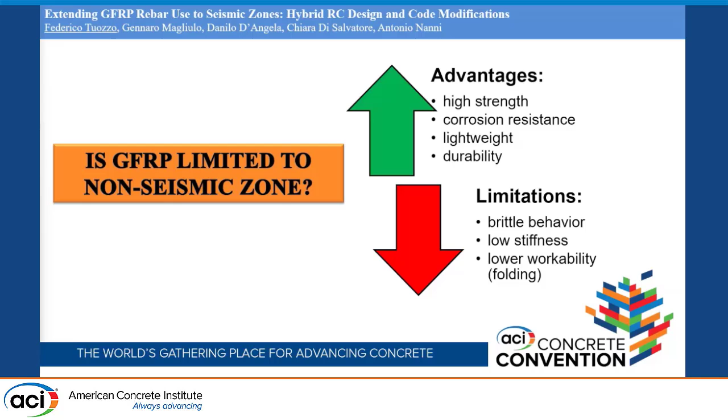The question we are addressing today is: is GFRP limited to non-seismic zones? To answer this, we will analyze the properties of glass fiber-reinforced polymer materials, GFRP. On one hand, it offers advantages such as high strength, corrosion resistance, light weight, and durability. On the other hand, it has limitations including brittle behavior, lower stiffness, and lower workability, which impair its use in seismic zones, especially for structures designed for energy dissipation as required by the last code.

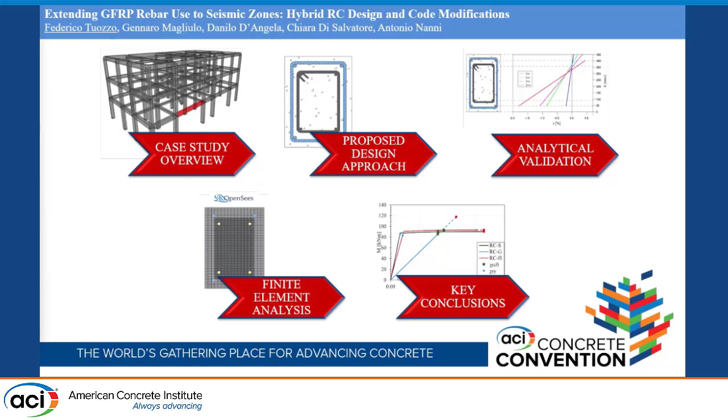To address this challenge, I will present the work carried out by my research group, which proposed an innovative hybrid section. After the pre-design phase, we focused on the beam, which was designed with three different approaches, one of which is hybrid, and the designed beam was analyzed through finite element and analytical methods, as we will discuss shortly.

The case study involves a reinforced concrete moment-resisting frame for a residential building, regular in both plan and elevation, designed according to the current code for a high seismic hazard site, such as seismic design category D, for example according to ASCE 7. After the pre-design phase, we focused on the beam highlighted in the figure, and the choice of this beam reflects its greater exposure to environmental elements with respect to the beams in the inner part of the building and its greater load demand with respect to the beams on the other floors.

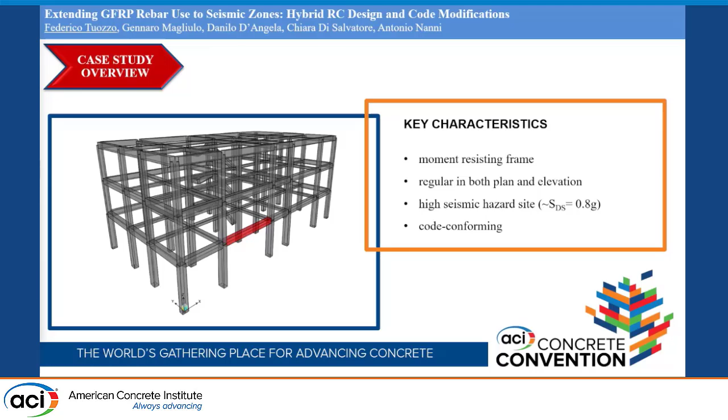The beam highlighted in the figure was designed with three different approaches. The first, a reinforced concrete section with traditional steel rebar according to ACI 318. The same cross-section with the same bending capacity, but with GFRP reinforcement according to ACI 440, and the last, the innovative hybrid section with the same cross-section and the same bending capacity that maximizes the properties of the materials involved in the section.

The GFRP used as stirrups and longitudinal reinforcement placed in the outer part of the section reduces the cover with respect to the traditional steel section due to its corrosion resistance, while the steel reinforcement in the inner part of the section doubles the cover with respect to the traditional steel section and improves durability and ductility of the section.

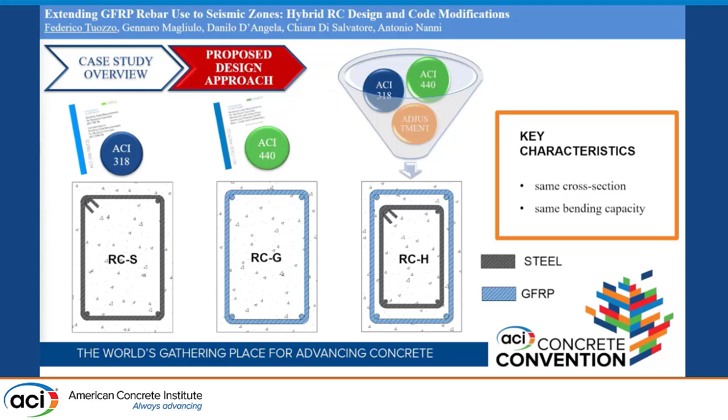The design approach was conducted according to the current code with some adjustments to consider the combination of these two materials involved in the section. This approach aims to improve the sustainability and durability of reinforced concrete construction. The design followed the current code, in particular ACI 440 for elements reinforced only with GFRP, and ACI 318 for elements reinforced only with steel, with some necessary choices and modifications to consider this innovative hybrid section.

In particular, regarding the strength reduction factor for tension-controlled sections, the current code proposes 0.55 for elements reinforced only with GFRP and 0.9 for elements reinforced only with steel. The lower value for GFRP reflects its brittleness, with a significantly reduced capacity during the design phase. However, in the hybrid section, the addition of the steel compensates for the lack of GFRP ductility. For this reason, we propose to adopt a value according to ACI 318 for elements reinforced only with steel.

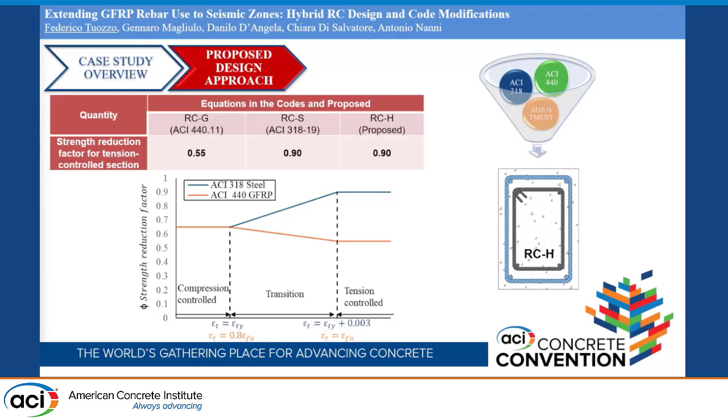Adopting the steel strength reduction factor for tension-controlled sections implies referring the strain, minimum reinforcement area, and balanced reinforcement ratio requirements to those of steel. For brevity, I will not go into the details about this choice, but regarding the shear strength, we proposed to consider only the contribution of the concrete and the GFRP stirrups. This is a safeguard approach, as there are no established models currently in the literature for evaluating the capacity of this innovative hybrid system with stirrups arranged in two different layers and made from two different materials.

About the concrete contribution to the shear strength, the current code's proposed formulas differ due to the reduction factor associated with GFRP reinforcement, caused by its lower elastic modulus, which results in greater deformation and cracking for elements reinforced only with GFRP, and this cracking impairs the shear strength of elements reinforced only with GFRP.

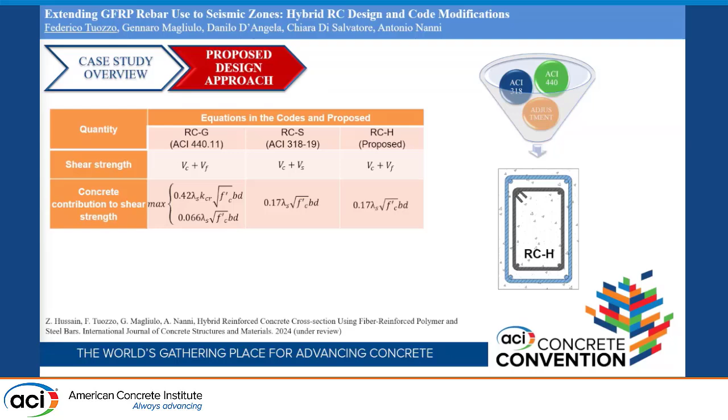However, in the hybrid section, the addition of the steel in the inner part of the section improved the stiffness of the element, leading to a response similar to the element reinforced only with the steel. For this reason, we proposed to adopt a formula according to ACI 318 for the element reinforced only with the steel. The proposed approach is summarized here and will be validated with further numerical simulation and experimental tests, and more details about this approach are available in the paper currently under review.

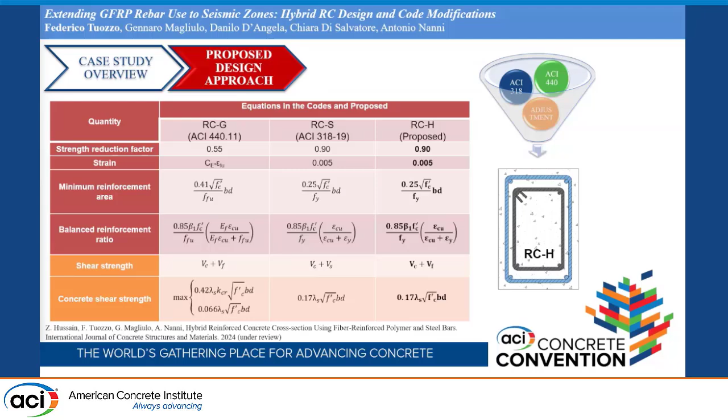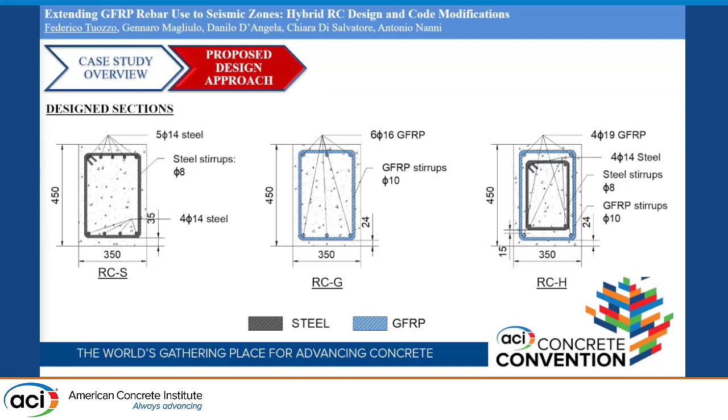The proposed approach led to the design of 3 different beams with the same cross-section and the same bending capacity, compliant with the respective code requirements. In particular, for the steel reinforcement, according to ACI 318, including the seismic requirements, and for the GFRP reinforcement, according to ACI 440. The designed beams were verified for seismic zones through Eurocode 8.

American codes mainly prescribe checks for seismic zones only in terms of dimensions and reinforcement quantities, while Eurocode 8 includes a local ductility check in terms of curvature. The demand was evaluated assuming the equivalence between the behavior factor from Eurocode 8 and the response modification coefficient and importance factor from ASCE 7. The demand depends on the characteristics of the structure and the seismic site, while the capacity was evaluated according to Eurocode 8 as the ratio of ultimate curvature to the yielding curvature, and in this case study was evaluated through analytical and finite element methods.

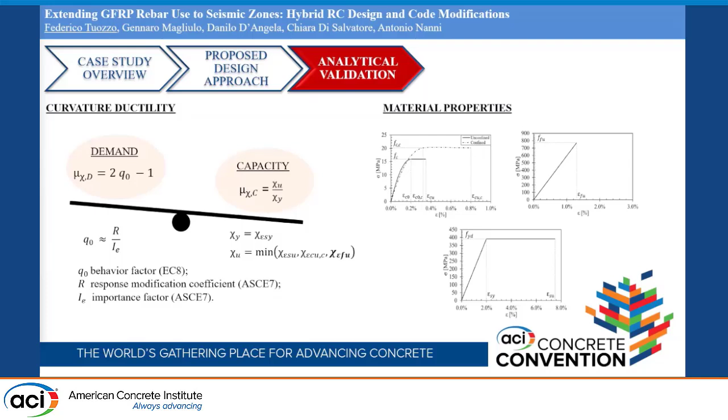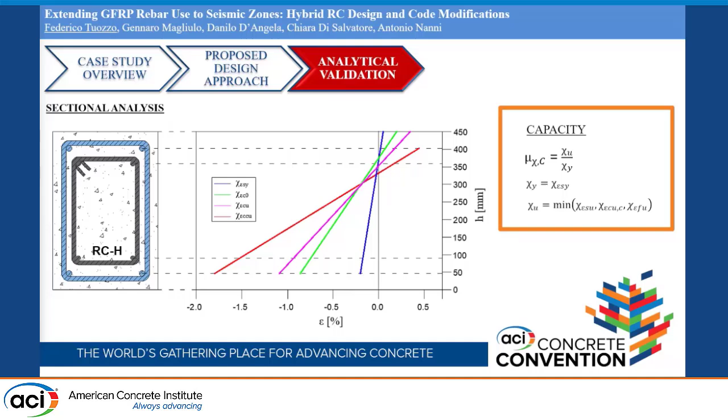In particular, for the section analysis, the material properties considered are shown in this figure. And here we present the section analysis of the hybrid section, evaluated by determining the equilibrium curvature at different limit states: yielding of the steel, elastic limit strain of the concrete, and both confined and unconfined ultimate strain of the concrete. Obviously, this section analysis was conducted for all beams designed, and the results are shown in terms of moment curvature curves. These curves show that the hybrid section has a similar performance to the steel section in terms of capacity and in terms of ultimate curvature.

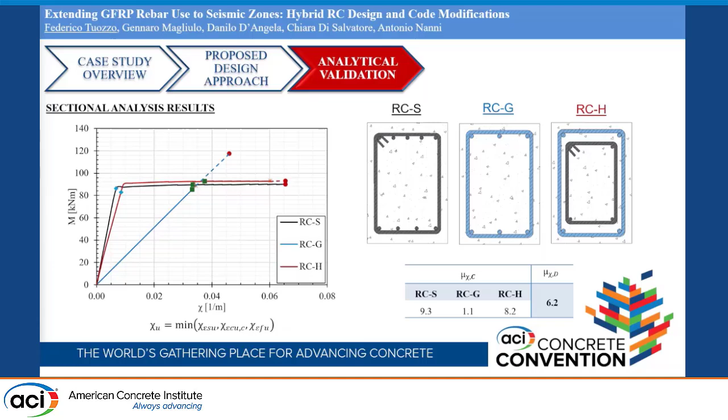The hybrid section has a lower stiffness with respect to the steel section and a slightly lower ultimate curvature with respect to the steel section, due to the lower elastic modulus of GFRP rebars and the ultimate strain deformation with respect to the steel section. But as shown in the table, the hybrid section and the steel section meet the requirement in terms of local ductility for high seismic hazard zones according to Eurocode 8. While, as I expected, the section reinforced only with GFRP shows a limited ductility and is inadequate for seismic zones according to the Eurocode requirement.

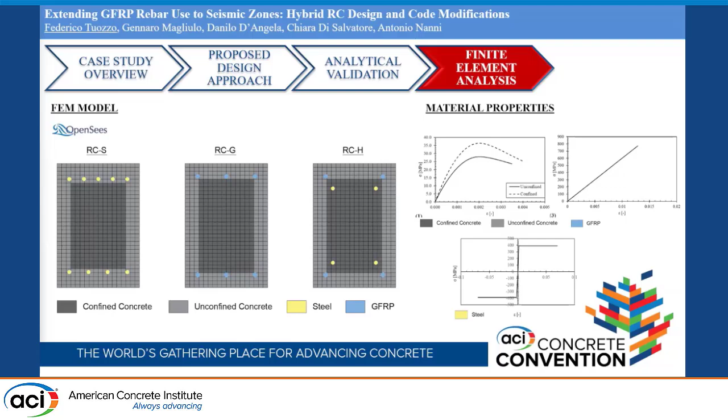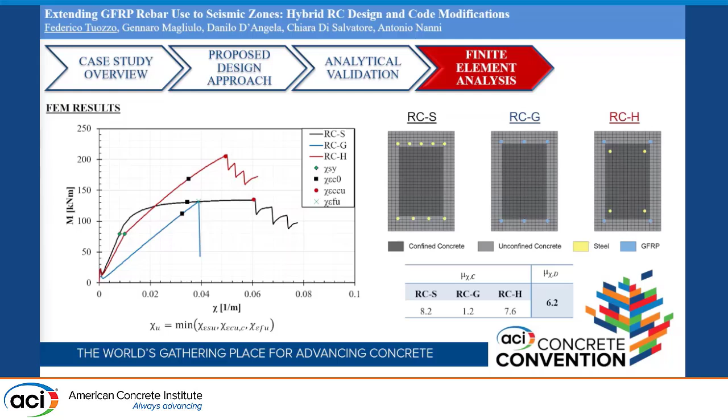The section analysis was validated through a finite element model using OpenSees software, adopting a fiber approach to consider the different materials involved in the section: confined and unconfined concrete, steel, and GFRP. The properties of the materials implemented in the software are shown in the figure, and the analysis was conducted through incremental static analysis in displacement control, and the results are shown in terms of moment curvature curves. The results confirm those obtained through the section analysis, in particular in terms of ductility capacity. The values differed by less than 10% with respect to the results of the section analysis. And both methods confirm the adequacy of the hybrid section for seismic zones according to the requirements of Eurocode 8.

The difference between the two models in terms of strength is due to the different behavior and properties of the materials implemented in the software, in particular the difference between design values and average values of material properties. Obviously, with the same properties, the two models match.

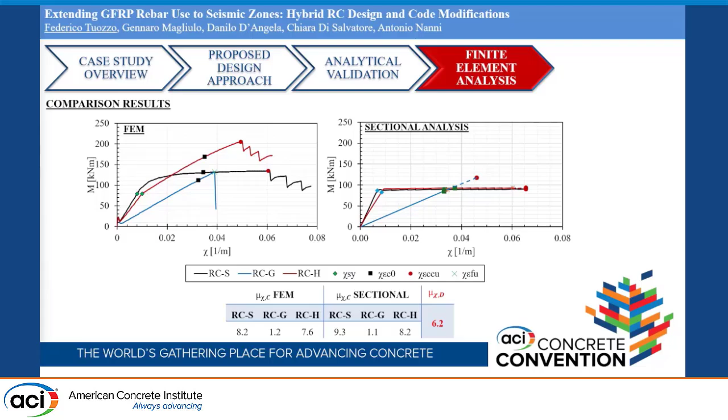In light of these results, we can affirm that the use of GFRP is not limited to non-seismic zones. Both methods showed the adequacy of the hybrid section for seismic zones according to the requirements of Eurocode 8. The hybrid section shows performance similar to the steel section in terms of strength and ductility, and significantly improves the ductility with respect to the beam reinforced only with GFRP. Experimental tests and further analytical simulations are the next step.